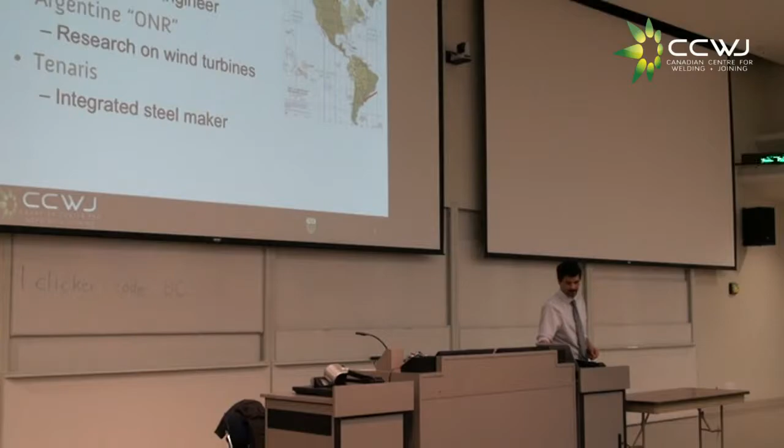And I worked at a company called Tenaris. Actually, Tenaris is an Argentinian company with branches all over the world. Even in Nisku, we have a manufacturing site for Tenaris. From there, I went to Boston. I went to MIT. I got my master's, my PhD there.

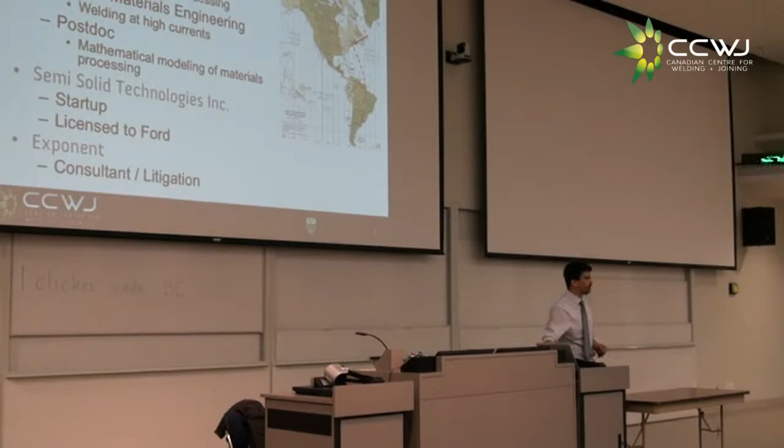And my mandate here was to start what we call the Canadian Centre for Welding and Joining. That is a center with the function of bringing the deep science and the deep engineering into making new technologies for welding. Here in the province, we have needs. Because of the cold, because of the oil sands, we have needs for welding that you cannot buy off the shelf. We're not a big enough market for the worldwide companies.

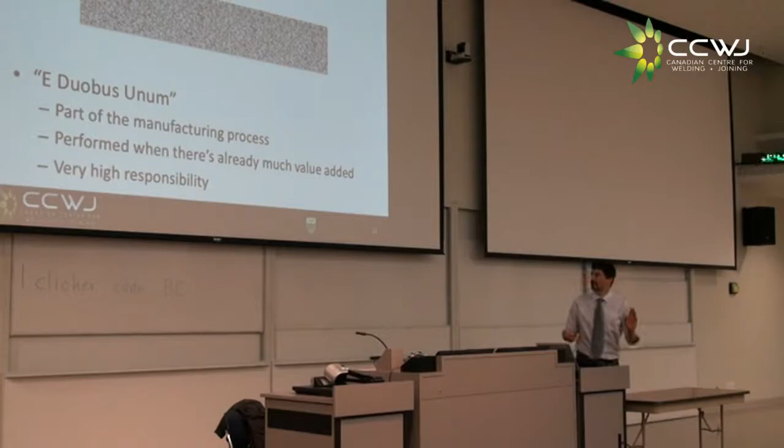Joining. What is welding? Let's start. Welding is putting two things together. And I think the best definition is from an institute in England, the Welding Institute, and they went for Latin. Duobus unum, right? That would translate loosely from two to make one. That's the best definition. You have two things, and if you join them right, they become one. That's the best you can hope for. And it never happens, by the way.

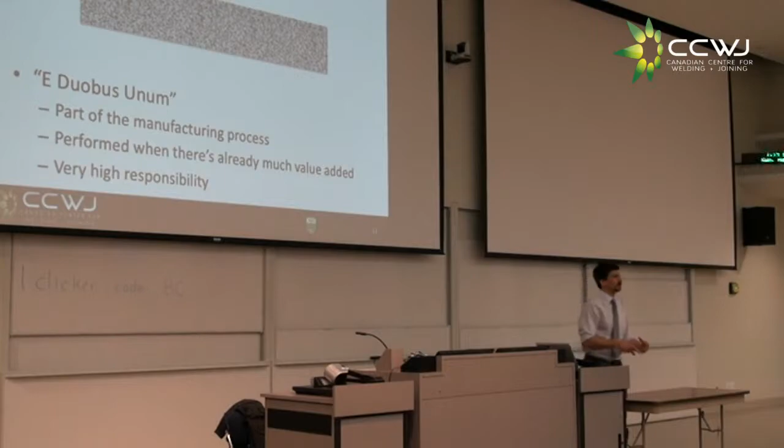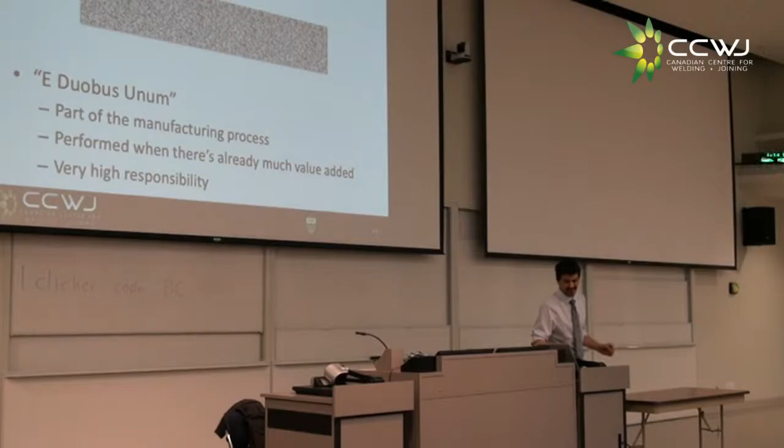So, welding is part of the manufacturing process. You do it when you already have much value added into your parts. You don't weld two chunks of iron ore. No, you weld two plates of carefully alloyed steel that maybe was heat treated, maybe was machined. Lots of value added. So when you screw up a weld, you're screwing up the work of everybody before you. And there's a whole lot of love to be lost when you do that. So what is welding? Right?

In welding, we do melt the plate. There are subtleties, right? Like, do I melt the plate? Don't I melt the plate? I'll tell you a little bit about those in the next slide. Now, do I melt the plate with a big spark, or with a laser, or with a flame? Whatever you did, if you melted the plate, that's welding, right?

And the important thing of welding is that after you melted it, the interface that you had that separated the two parts, right? Right now, there is an interface between this table and this cabinet here, right? And I can pull it apart. But in welding, what we do is we do away with all this interface by melting it. And then when you go solid, there's no interface anymore. The atomic bonding gives continuity all through the joint, right? So that's the important thing.

It's different than bolting. In bolting, I will keep these two together as long as I have my bolts, but the interfaces are still there. So you might or might not add new material. That's secondary. And of course, if you were to look at the material in a microscope, materials look very patterned, much like the tiles here on the floor. And when you do all this heat, this pattern gets very altered. And that's how, if you know what to do about it, you can become a consultant and make a lot of money. And come to our lab, I'll tell you how.

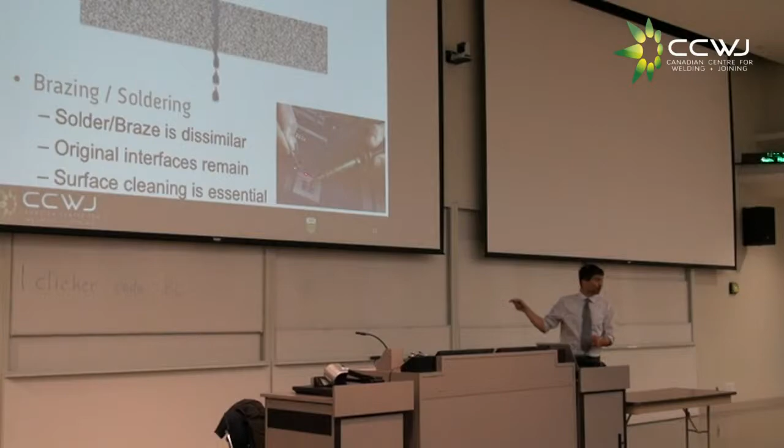Here, the most important one. I hope nobody here works with JB Weld, but let me get this straight. JB Weld is not welding. That's an epoxy. And despite what they call this, the black one, they call it the steel. No, that's not steel. That's a polymer. Polymers are beautiful and they do many good things for you. But welding is welding and metal is metal, and there's a reason why they use that.

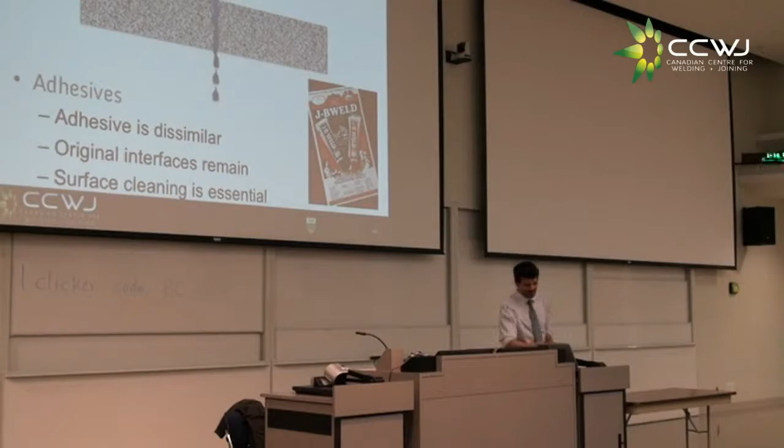Right? So, now that we are clear on some things, I'll tell you what we do here in Alberta that is interesting. And I'm going to drop this word. So I was just saying welding, so many people, especially those who might have seen all the movies, think that most welding is done with a flame torch. Well, true, but that hasn't been used in so long that they don't even teach it at places like NAIT now. You can use lasers, you can use like a little stick, right?

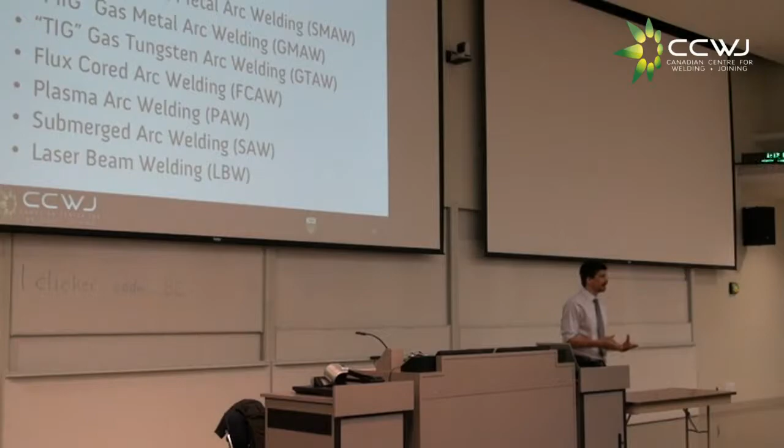Like the guy with the little stick welding? Okay, they call it stick. And these, or MIG, or TIG, flux core, plasma arc, except the first one and except the last one, right? All these ones in the middle, we call electric welding. And if you're a welder and you care about this, there are lots of subtleties to mind. But overall, the science has many similarities. And that's the science I want to talk about. The science of electric welding.

So let's take a fantastic voyage into the weld, right? So chances are you saw, especially if you've been around campus, a welder and a beam, right? Like you see this bright spark. Here we have our Joe welding a beam in a building construction. So let's go closer. Okay, here we have Joe with a smile, and here's his weld, right? And you get to see the sparks. And pretty much everybody who works with welding, they love these pictures, right? Oh, the sparks, look at all that. Well, this is so old school because the message you get from here is the sparks.

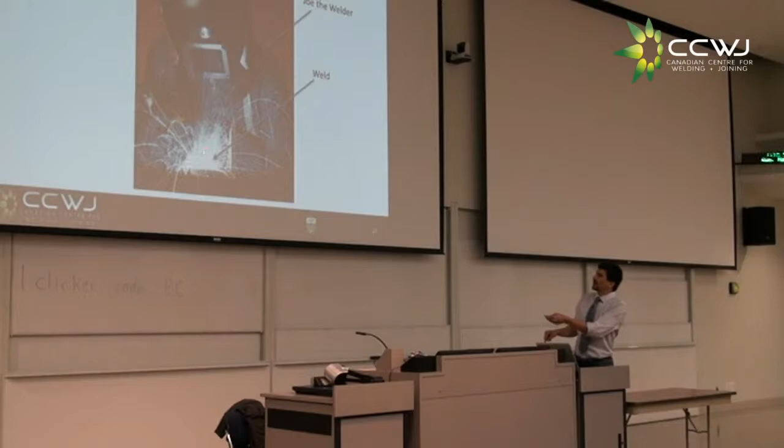Let's go one more level in, to the level at which, for welders, it becomes difficult to discriminate. So now, okay, let me go back. So you see the spark, right? And here you have the weld. Now let's look at the weld. So here, all this is the weld, right? And if you filter the light properly, you get to see things a little bit more clearly. And that's why the welders have these tinted glasses. So here you have molten metal. Here you have this bright light, which we call an arc, and which is plasma. And here you have the electrode.

And there are so many types of electrodes. All this long list of different welding processes I mentioned 2 slides ago, they all depend on: do I melt my electrode? I don't melt my electrode. Or do I melt my electrode and then I have to chip off some slag? Or don't I? So those things, within the same science, matter a lot. And here you get to see. Right? So now we are deep into the weld itself. And you realize that while this width might be about 5 millimeters, there's a whole world going on in there. Right here, you can see something that is amazing.

Most disciplines of either science or engineering work in what is called equilibrium, in which if something is hot, it's hot. If it's cold, it's cold. In a weld, you have to be hot somewhere, and you have to be cold somewhere. Because if you're not hot, you don't melt the metal, and then it doesn't work. But if you're too hot, then you melt everything else, right? And you have another problem. So in welding, by definition, with no other way around, you have to be out of equilibrium.

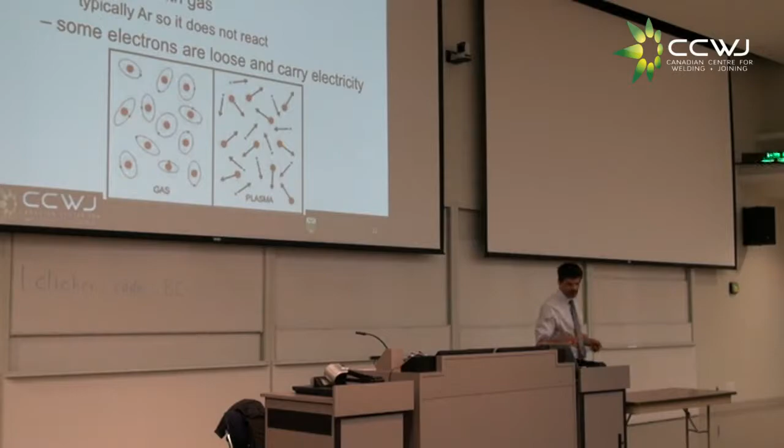So, of course, in the gas, it's not a vacuum. It's a gas. Typically, the gas is an inert gas, argon, because inert gases don't react, so you would not oxidize your material. You would not introduce alloying elements. You would not take alloying elements out. You can also use helium if you can afford it, right? So that's how electricity gets carried. Things are hot, electrons are loose, and then they carry electricity.

But the other question, something I said in the abstract: how hot are these electrons? Well, the arc is very hot. Very hot. Look, the surface of the sun is more or less 6,000 Kelvin. Right? And it's a plasma. The bright light of the sun is essentially a welding arc, a weak welding arc. Because what we have here is 20,000 Kelvin.

People can measure it by using spectroscopy, and we have a spectrometer in our lab. Or you can do numerical modeling. This is the result from a numerical model we did when I was still in Boston. And this red part here, that's 20,000 Kelvin dead on. That's very hot. That's lots of ionization there. And one of the reasons it's so hot is because at atmospheric pressure, the ions and the electrons are close. So for the electrons to move, everything has to shake.

For example, if you look at the ceiling, you see the fluorescent tubes, right? It's a plasma tube. Now, that's not 20,000 Kelvin. You can even touch it. And the difference is that plasma is at very low pressure. So at low pressure, the electrons and the ions are separate. So the electrons can move without causing all this heat in the ions.

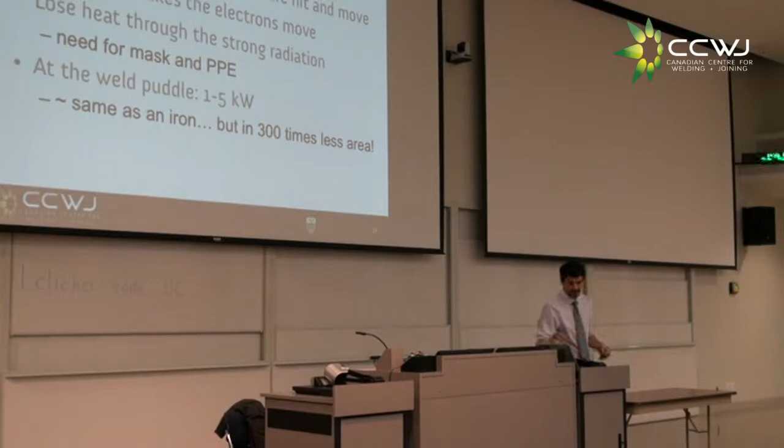So, as I was mentioning, it's so hot because the electrons move and hit everything. That's why you need a mask, you need protection equipment. There's lots of ultraviolet. The amount of energy in a weld is more or less the same as an iron. And you never think you're welding your shirts when you iron them. But if you were to concentrate all the power of the iron in a 300 times smaller area, probably you would have some ventilation by the time you put it on.

So the other interesting thing is that electricity causes motion, and we know this because that's what happens in electric motors, right?

Electricity can do pretty interesting things for you. And so look at this. If you model the electromagnetic fields around your weld, what you would see is that where the arc is narrow, you have tight magnetic fields. When the arc is broad, you have broader magnetic fields. And that creates motion. I think these arrows come from the same model that I discussed before about inducing motion in the same model of the arc.

Look, if tighter magnetic fields make stronger electromagnetic forces, and the top is tighter than the bottom, as you get to see with your own eyes, right? You have more pressure on top, and this pressure differential causes motion, right? That's Bernoulli's law for those of you who are familiar. It can be as simple as that.

But the end result, by the time you do your calculations, is that the velocity of the plasma is about 300 meters per second. Now, 300 meters per second is pretty fast, faster than this plane, for example. Right? It would be the speed of sound at room temperature. Now, when you're this hot, the speed of sound is much faster. So the plasmas in welding are typically not supersonic, but the velocity they have is pretty impressive.

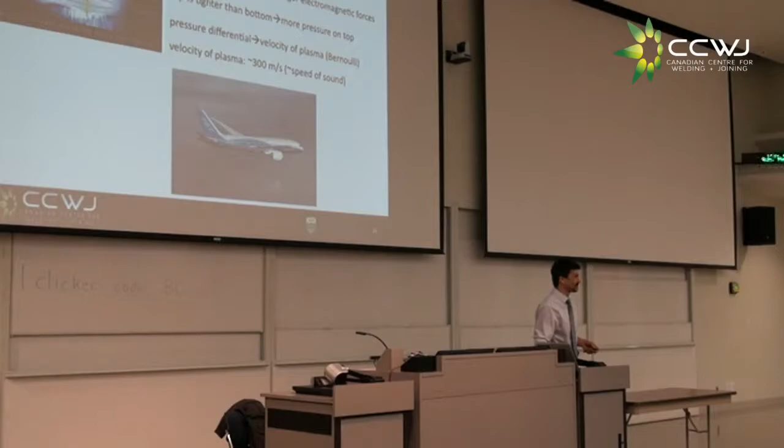And all these can be controlled by a guy who barely finished elementary school. All right? And then you trust your life by walking next to a pressure vessel that you don't know is at incredible pressure. To study all this motion and temperatures in welding, you need to use the discipline of magnetohydrodynamics, which is an awesome buzzword to drop at a party, right?

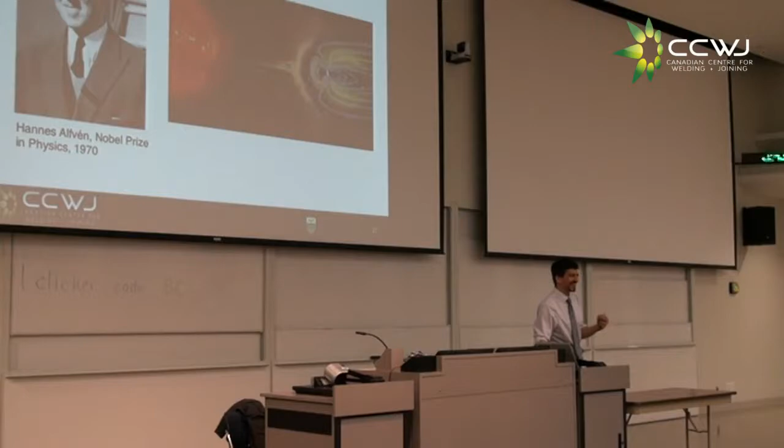And the guy who started this discipline is Hannes Alfvén, who got, for doing this, the Nobel Prize in Physics in 1970. He was doing it for the surface of the sun, to explain some of the plasma arches on the surface of the sun. And by the way, he's the only engineer I know who got the Nobel Prize. Okay? So, again, there is some more to welding than just being big and burly.

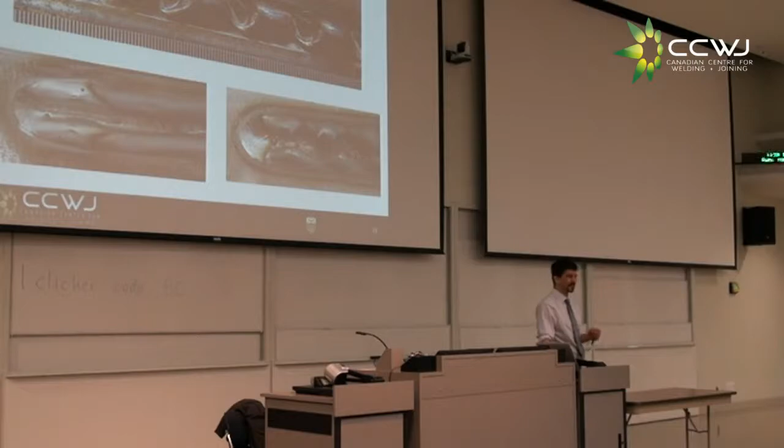And not only is it very theoretical, because it has consequences, this fast plasma. And these are photos of my PhD, so I'm glad I get to use them for something again. So these welds have all these defects that are a consequence of the fast plasma that acts more like a cutting torch instead of a welding torch. So you've got to know what you're doing. And to know it, you need a lot more than elementary or high school, even bachelor's education.

So now, what about the electrode? Here we have this tungsten arc welding that did not melt the electrode. But sometimes, if you want to add material, you want to melt the electrode, right? And you can melt it into many small droplets or a few big droplets. Here you have the droplets. You have current. Typically, you reverse the polarities, the current goes in the other direction. But you still have a plasma arc, and you still have electromagnetic fields, and you still have heating.

And I want to show you what it looks like when you look at this electrode from close up, as we do. So we're in our voyage right at the core of what the weld is.

And let's see if I can control the lights here, which I believe I can. Somewhere. The wall. Okay. Oh, I was by the wall.

Well, in short circuits, when the electrode does touch the puddle, the molten metal, then you have a surge of current. Now, this is some of the work we're doing in the province, and that nobody knew before. And so this, you see, is new even for people in the field.

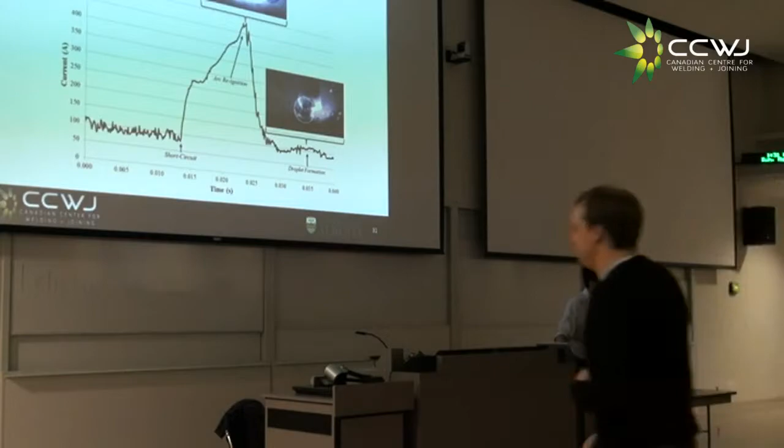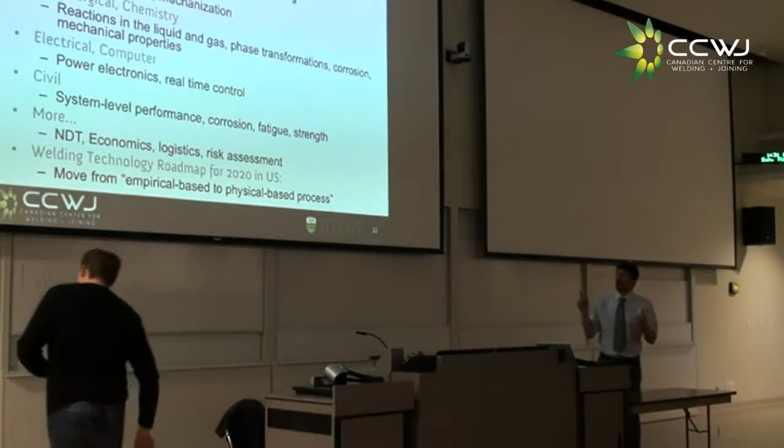So there's so much depth you can go into welding, and you can do so much math, right? So, talking about that, my last two slides. Welding is interdisciplinary. You need to know your physics, and you need to know the language of physics, which is math. And you need to know a ton of engineering, from mechanical to solid mechanics. You need to know your metallurgy, you need to know your chemistry, and that's what we're working very hard on in the lab. You need to know your electricity,

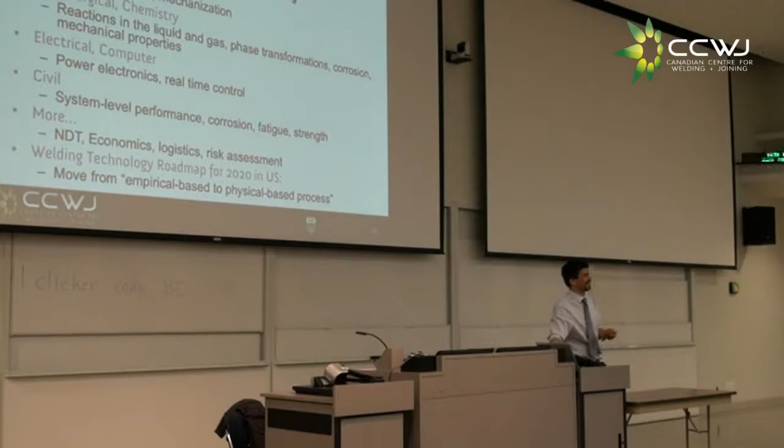issues of civil engineering, and none of this would make sense if it wasn't economical. So even that you have to keep in mind, right? The current push for welding worldwide is to understand welding. Because, well, yes, we can weld, but if you don't understand it, you use new alloys and things get tough.